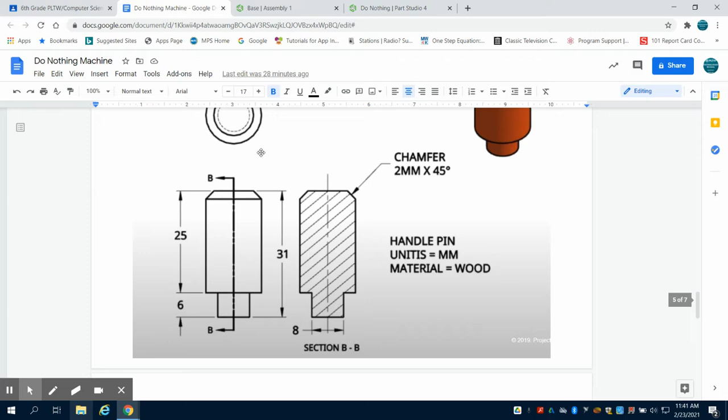In the previous video, we built the slider and the handle. Now we're going to do the handle pin and the slider pin. Let's take a look at this and come back.

I created another part studio down here. I'm going to lay my sketch on the front plane and draw this in the side profile view so we can revolve this. It's going to be 4 millimeters here.

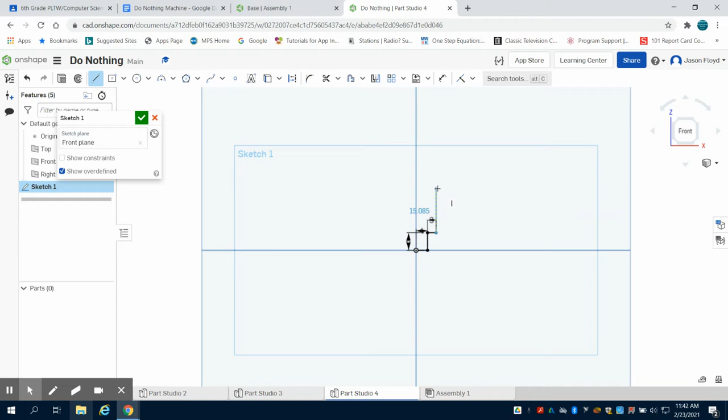We're going to go up 6 millimeters, then go to the right at this point. Let's see, we got half, which would be 7. So we go 3 millimeters to the right, then come up 25 millimeters, and then just come back around and join our drawing.

Then I'm going to hit the escape button to get outside of my tool. I'm going to revolve this along that center axis here. Green check mark that. Then I'm going to come up to my chamfer tool, and there's a 2 millimeter chamfer on the top here.

So I can right click on this, rename this, and this is my handle pin. Again, if you want to change the appearance, we can right click on this, edit the appearance, and then you can choose a color for this as well.

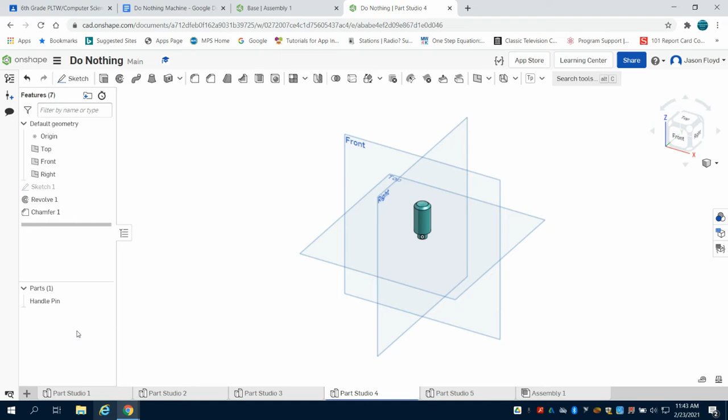Next, I'm going to create another part studio down here. This time I'm going to do my slider pin. I'm going to do it in that same side profile view and then revolve it.

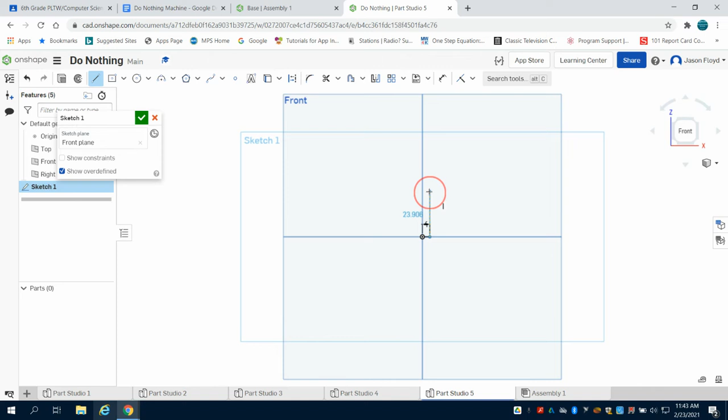I'm going to lay a sketch down on the front, orientate myself, grab my line tool, and simply come over that same 4 here. I'm going to go vertical 25 millimeters, go to the right 3 millimeters, go up 4 millimeters, and then just come back around with right angles and close out my drawing.

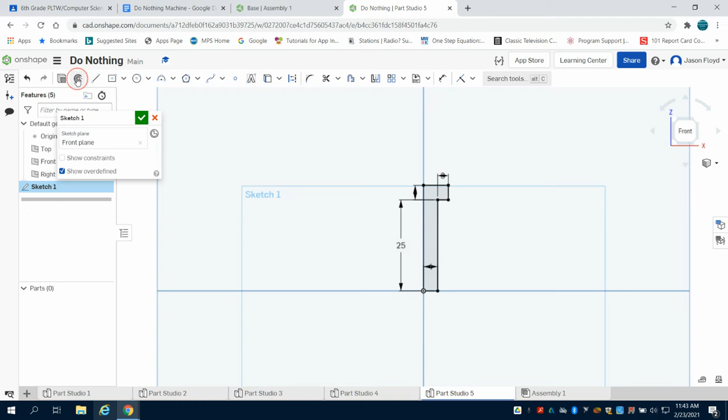Then I'm going to hit that escape button to exit. I'm going to revolve around that center axis here. And I have my pin.

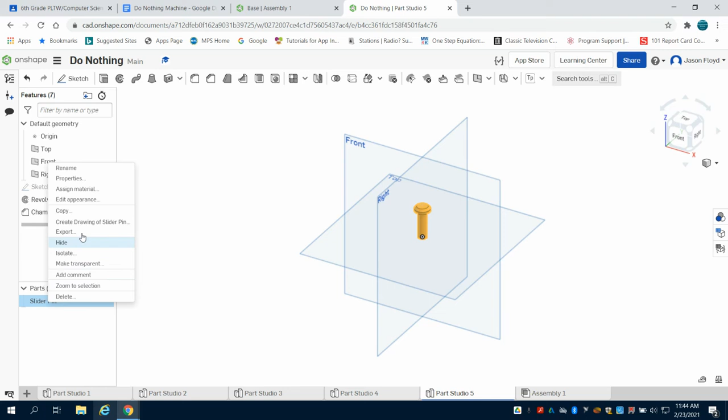Again, we're going to chamfer this. If I choose that top face, there's a 2 millimeter chamfer on this. I can come down here and rename my part slider pin. I can also right click on this, edit my appearance, and again you can choose a color.

Now I have all of my parts completed, so I'm going to do an assembly. I'm just going to come down here and create a new assembly because I already have one. I'm simply going to insert all of my parts.

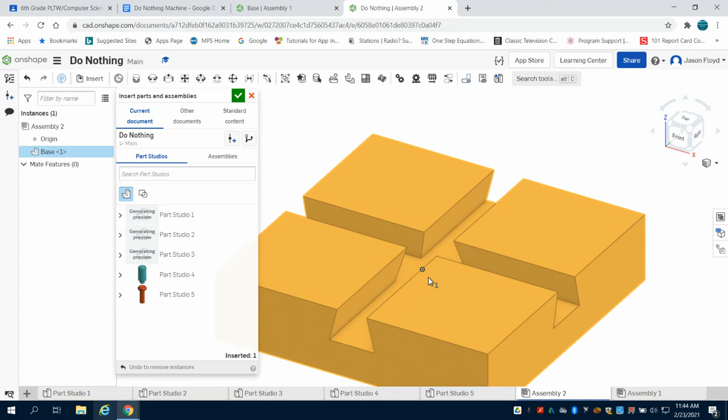So we can see here are all my parts. I can come to Part Studio 1 and bring in my base. I can come to Part Studio 2, and I need, of course, 2 sliders on this. Part Studio 3 or 4, I'm sorry, I can grab my handle.

I did skip my... and I'm just going to delete that off right there. I'll come back and do that, and then I'll bring in my peg, and I need 2 of those.

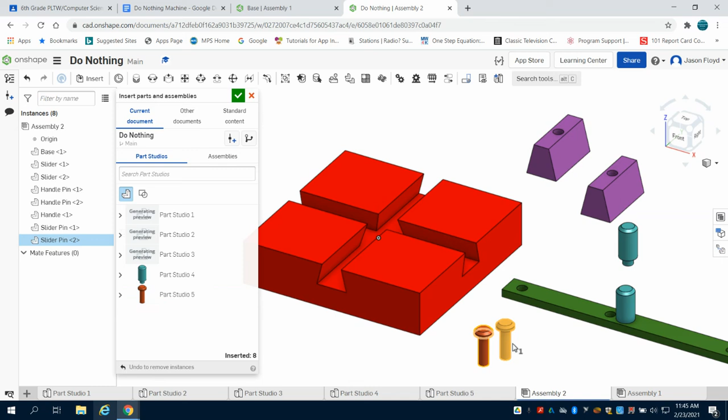The one thing that I want to do with my base is I want to right click it as I brought in that base here. We can do it over here, right click, and I want to fix it so that's not allowed to move while the others are allowed to move. And that extra handle I'm just going to delete off there.

In the next video, we'll talk about how to assemble these.